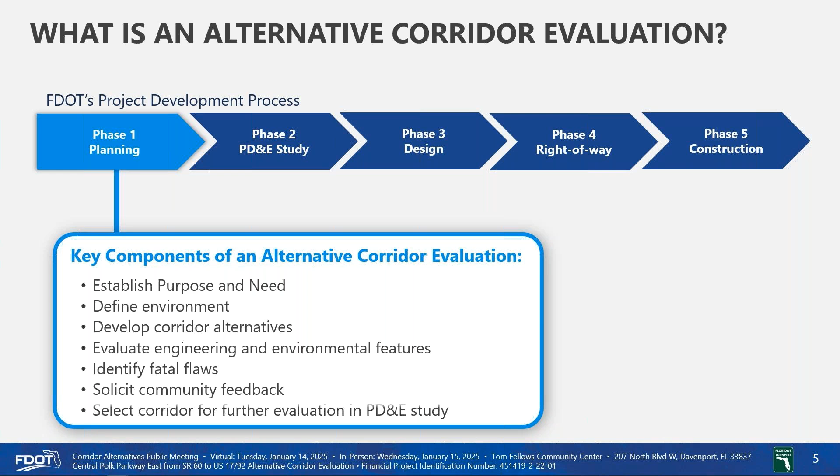The planning phase is the first phase of FDOT's project development process. An alternative corridor evaluation, or ACE, is a planning level study. Key components of an ACE include establishing the project's purpose and need, defining the environment, and developing corridor alternatives. The engineering and environmental features of each corridor is evaluated, fatal flaws identified, and community feedback solicited. If a feasible corridor is found, then it moves to the PD&E study phase for further evaluation.

The study area is located in northeast Polk County. The study area is a large swath that begins on State Road 60 west of the US 27 corridor and extends approximately 28 miles north to US 17/92 near Ernie Caldwell Boulevard.

The alternative corridor evaluation will consider options for a new tolled, limited access highway from State Road 60 to US 17/92. The highway would be constructed initially with 4 travel lanes, 2 in each direction, expandable to 6 travel lanes. Interchange locations will be evaluated in the next phase, which is the PD&E study.

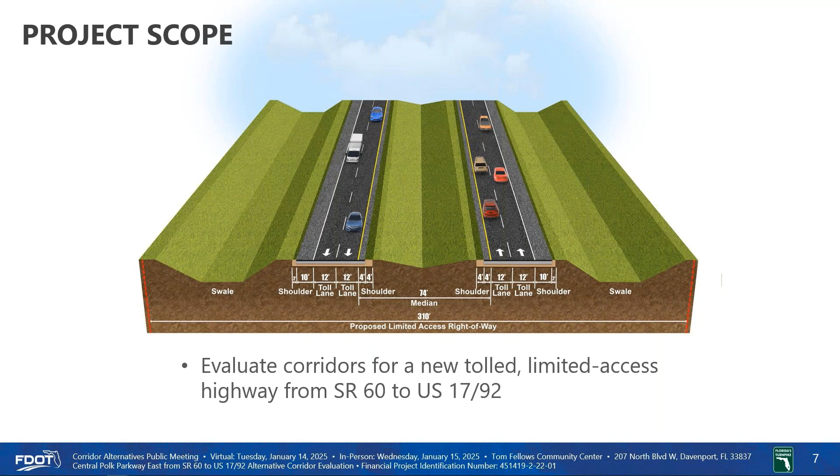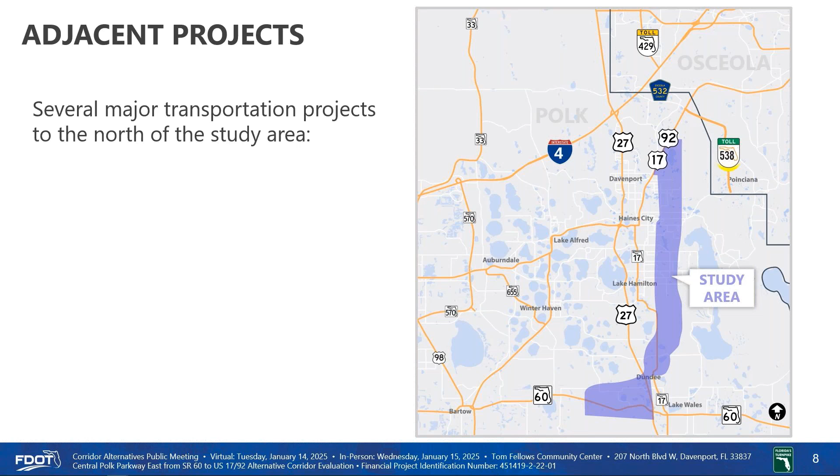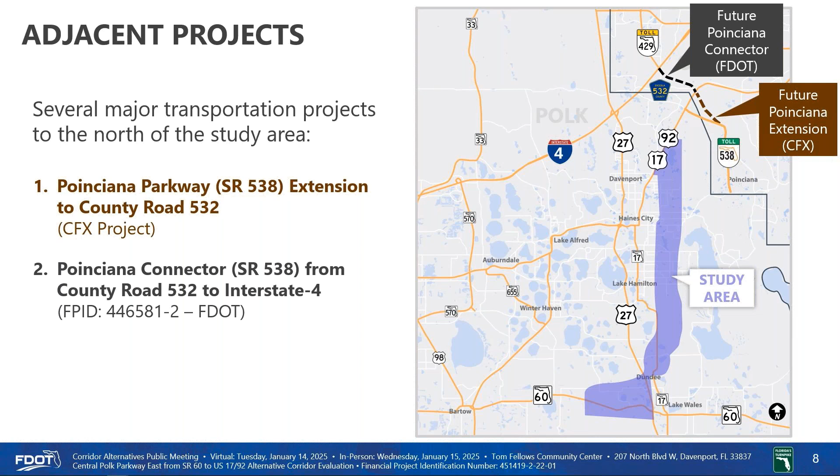There are several major transportation projects to the north of the study area. These include projects to extend Poinciana Parkway, State Road 538. The extension of Poinciana Parkway to County Road 532 is being completed by the Central Florida Expressway Authority, or CFX. The Poinciana Connector, a project to extend Poinciana Parkway from County Road 532 to Interstate 4, is underway by the FDOT. Also, the enterprise is conducting a PD&E study to evaluate a new, tolled, limited-access highway from US 17/92, south of the Power Line Road extension, to the future Poinciana Connector.

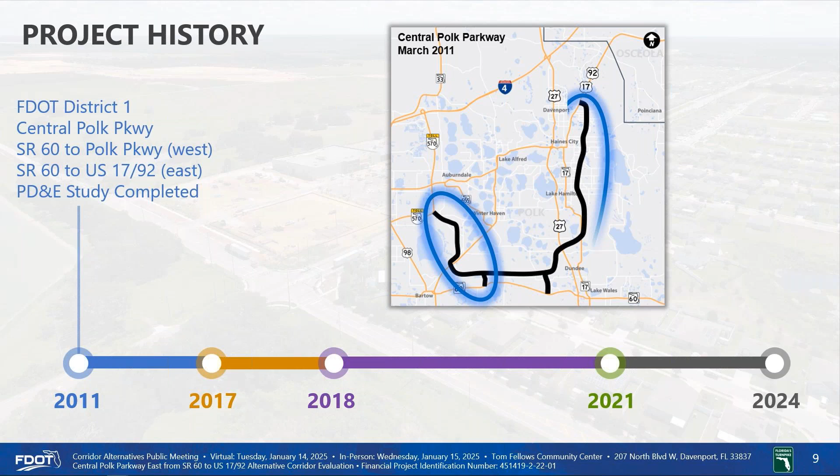An alignment for the Central Polk Parkway East project was approved in a PD&E study completed by FDOT District 1 in March of 2011. The District 1 PD&E study identified an alignment for a new highway from State Road 60 to Polk Parkway on the west and State Road 60 to US 17/92 on the east. The projects were transferred to the enterprise in 2017, and the enterprise immediately began piecing the puzzle together. Design of the Central Polk Parkway from State Road 570 to US 17 State Road 35 began in 2018, and the highway is currently under construction.

A PD&E study was conducted to extend Central Polk Parkway from US 17 State Road 35 to 60. Design is completed, and the project is anticipated to start construction in early 2025. The enterprise also conducted a feasibility study in 2018 to evaluate the addition of limited access general toll lanes on US 27. Results showed that it was not cost feasible.

In 2021, the enterprise reevaluated the route for the Central Polk Parkway East from State Road 60 to US 17/92 that was approved in 2011. However, construction of homes and businesses along the route required significant alignment changes, requiring a new evaluation. This Alternative Corridor Evaluation, or ACE.

A project's purpose and need are the reasons why the project is necessary and serve as the basis for identifying reasonable alternatives. The need for the Central Polk Parkway East project, established in 2011 by FDOT District 1, has been updated based on current and forecasted transportation deficiencies. The project needs include accommodating year 2050 transportation demand, improving regional connectivity, enhancing freight mobility and economic competitiveness, and enhancing safety and emergency evacuation.

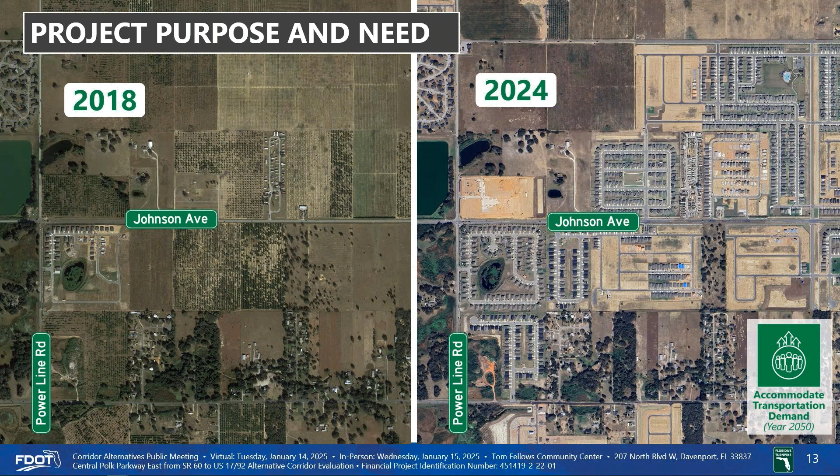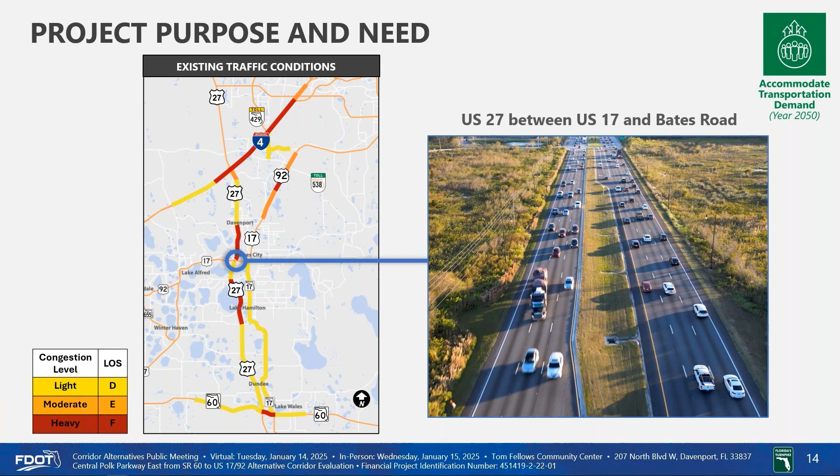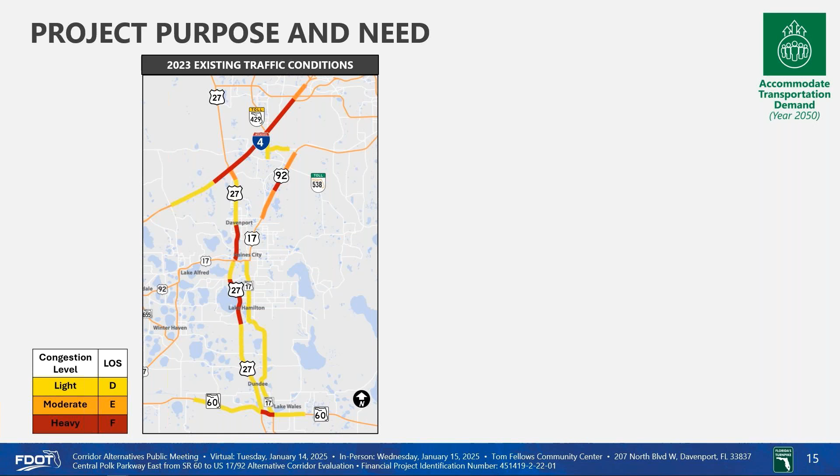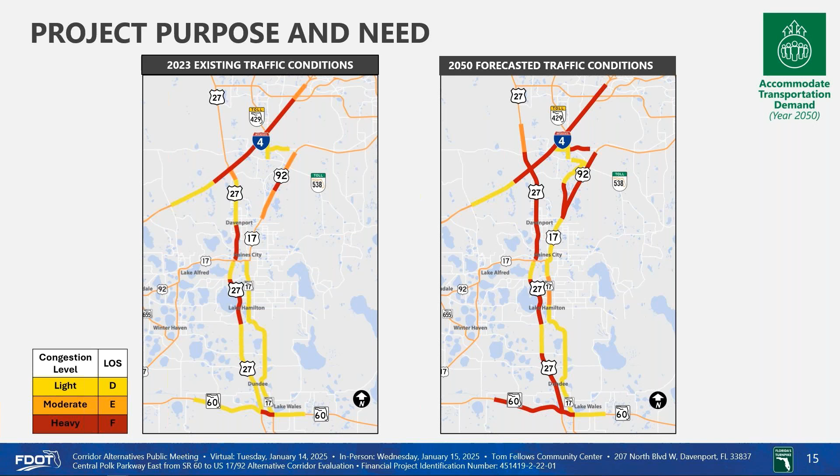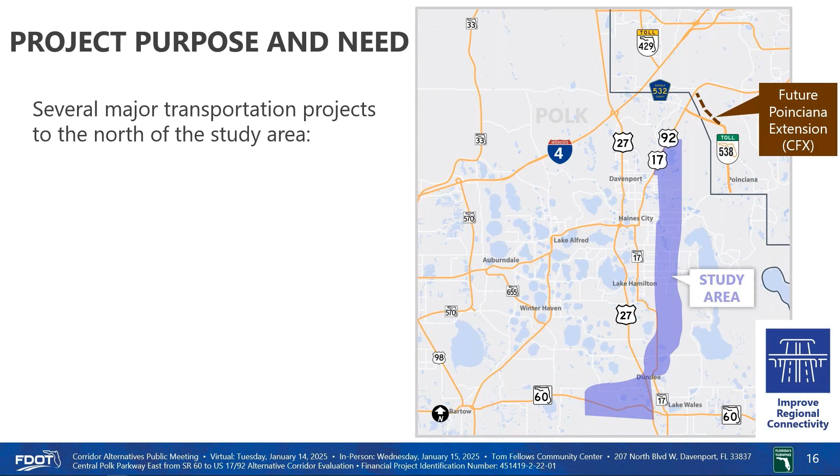Earlier in the presentation, 3 major transportation projects to the north of the study area were mentioned: the extension of Poinciana Parkway to County Road 532, the Poinciana Connector, a project to extend Poinciana Parkway to Interstate 4, and a PD&E study to evaluate a new tolled limited access highway from US 17-92 south of the Power Line Road extension to the future Poinciana Connector.

With the Poinciana Connector, this project would provide a direct link to State Road 429 and Interstate 4, relieving congestion on US 27 and other area roadways. Drivers will experience significant travel time reduction.

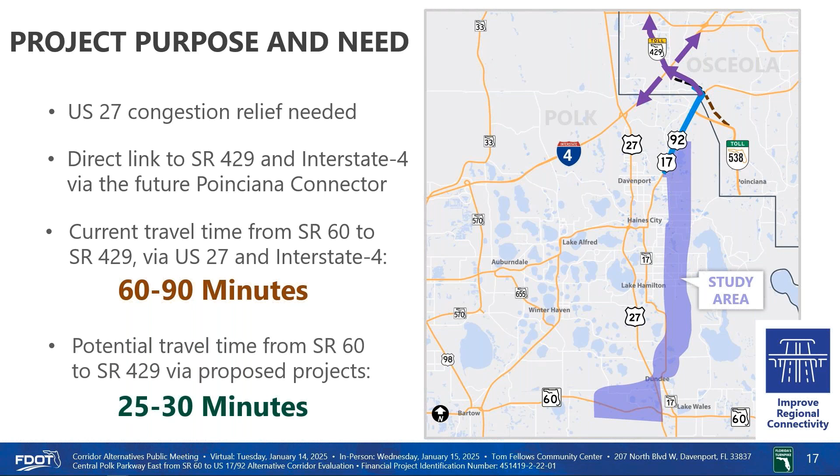For instance, current travel time from State Road 60 to State Road 429 via US 27 and Interstate 4 is approximately 60 to 90 minutes during peak periods. If the major projects were to be constructed, the potential travel time from State Road 60 to State Road 429 could be 25 to 30 minutes.

With more than 13 million Florida residents located within 100 miles of Polk County, the county's transportation system plays an important role in supporting regional and statewide goods movement. Based on 2023 data, Polk County supports more than 81 million square feet of freight-related land use, a total area more than twice that of the freight-related activity in nearby counties.

The Intermodal Logistics Center in Winter Haven is a major freight activity center with a capacity to process up to 300,000 containers per year. There is a need to improve the overall circulation of freight goods and support economic development within the area.

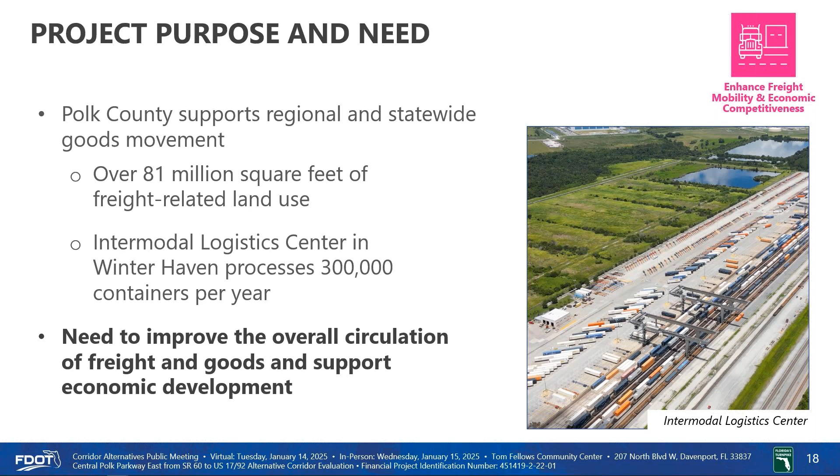The Central Polk Parkway East project will provide an additional option to the existing local and regional routes, thereby enhancing emergency response times and mobility during emergency events.

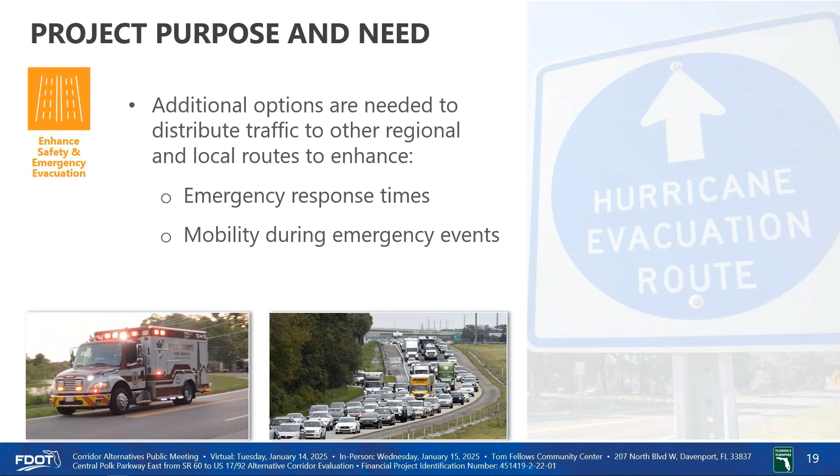Having established the project purpose and needs, the next step in the process was to define the existing conditions. There are numerous socio-cultural and environmental features present within the study area that influence the location of the corridor alternatives.

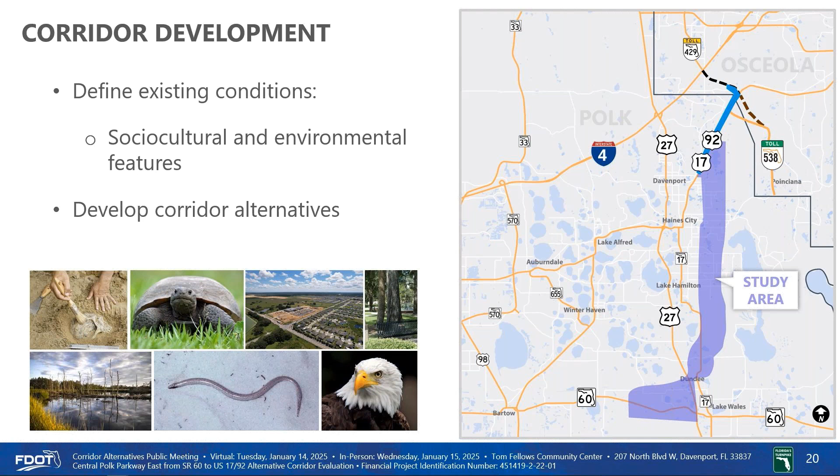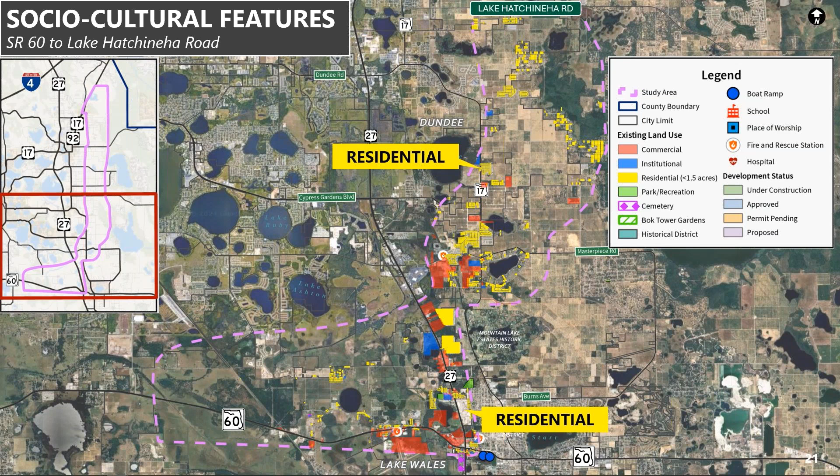Socio-cultural features include established residential neighborhoods with parcels less than 1.5 acres and areas of proposed development. The Lake Wales Historic Districts, Bok Towers, Eagle Ridge Mall, and the Intermodal Logistics Center fall outside of the study area. Impacts to these features will be avoided or minimized to the greatest extent possible.

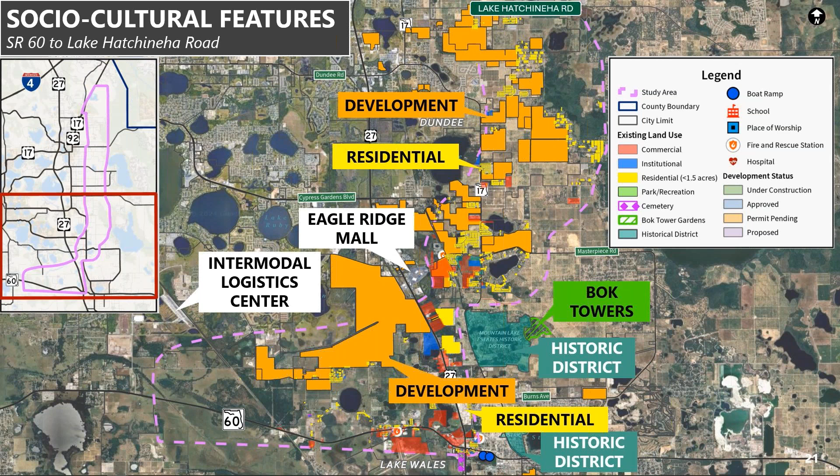Due to the size of the study area, the details of this overall map may be hard to see. To view these maps in greater detail, please refer to corridor maps on the project website or at the in-person meeting. Each map will have a legend that explains the symbols used for each feature shown.

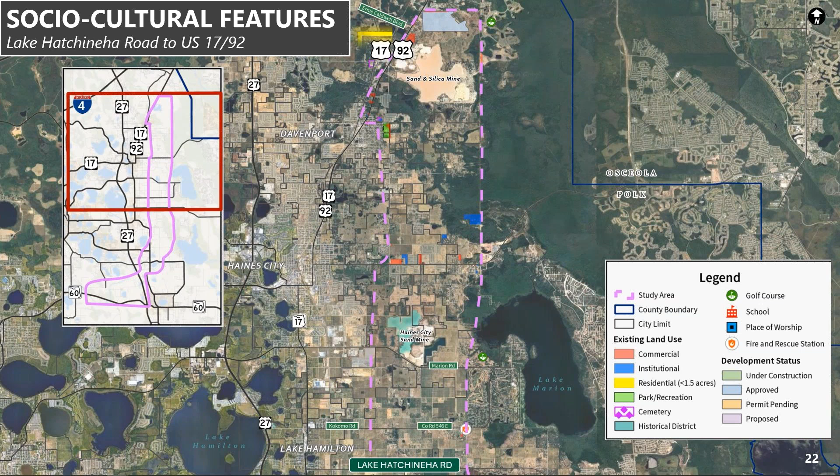Socio-cultural features within the northern half of the study area, from Lake Hatchineha Road to US 17-92, include public institutions such as churches, schools, and fire stations, established residential neighborhoods with parcels less than 1.5 acres, and new developments.

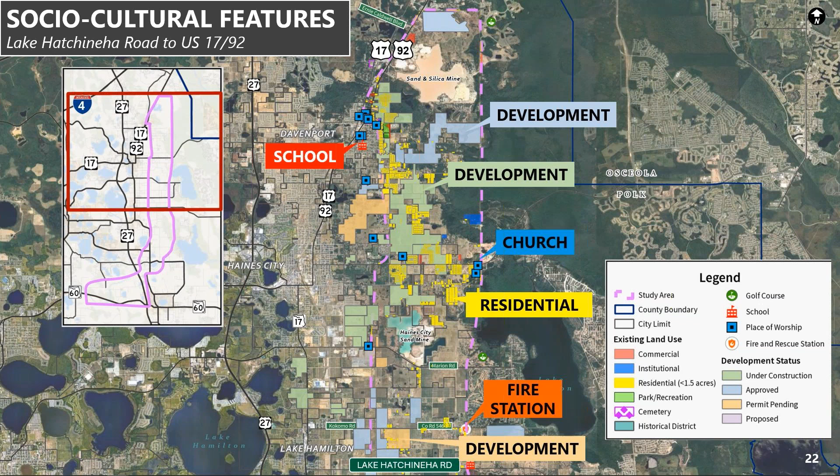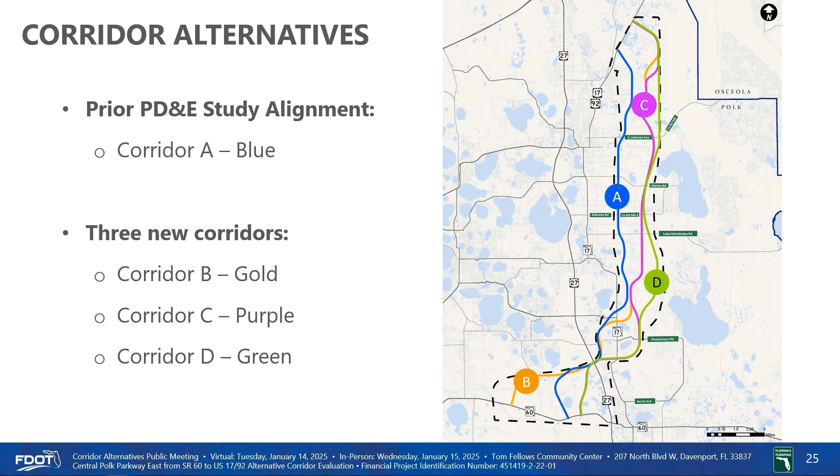On this map, we will present the corridor alternatives within the southern half of the study area, from State Road 60 to Lake Hatchineha Road. All the corridors will begin at State Road 60. Corridor A, from the prior study, is shown in blue. Corridor B, in gold, starts the furthest west on State Road 60. Corridor C, in purple, starts the furthest east on State Road 60. And Corridor D, in green, closely follows Corridor C until north of Masterpiece Road.

Due to the size of the study area, the details of this overall map may be hard to see. To view the corridor alternatives in greater detail, please refer to corridor maps on the project website and at the in-person meeting.

On this map, we will present the continuation of the corridor alternatives within the northern half of the study area, from Lake Hatchineha Road to US 17/92. All the corridors will end at US 17/92. Corridor A from the prior study is shown in blue. Corridor B in gold is located toward the east within the study area. Corridor C in purple closely follows Corridor B. Corridor D in green would be located the furthest to the east within the study area. To view these maps in greater detail, please refer to corridor maps on the project website or at the in-person meeting.

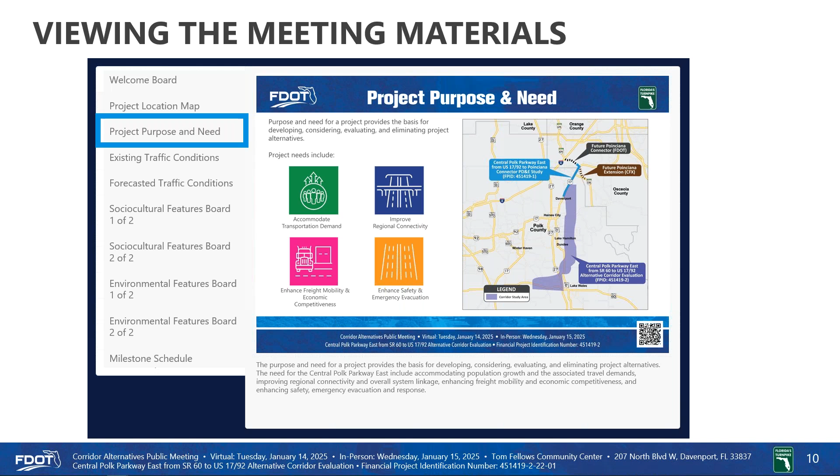As mentioned at the start of this virtual public meeting, we will be responding to questions that were submitted through the meeting registration. I'd like to acknowledge that we did receive quite a few questions directly to me at my email address and through the project website. All questions will be responded to at a later date, but this evening we will focus on the questions submitted through the GoToWebinar meeting registration.

Tonight we'll be answering 65 questions, the first being—and this is where Imran Ghani from the project team will jump in to start assisting me with answering these questions. The first being: what is the specific route contemplated?

As shown in the presentation, there are 4 corridor alternatives under evaluation: corridor A, B, C, and D. They are being presented for community feedback. Detailed corridor maps are available on the project website and will be shown at the in-person meeting tomorrow.

We anticipate presenting the selected corridor for public input at a public meeting in the second quarter of 2025. The final alignment within the selected corridor will be determined during the PD&E study phase. Right now what we're doing is presenting 4 corridor alternatives, which will eventually be narrowed down to 1 for further evaluation in the next phase.

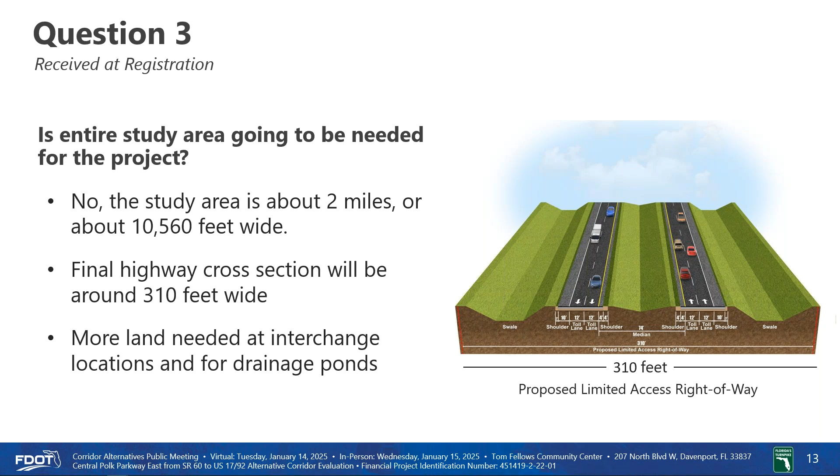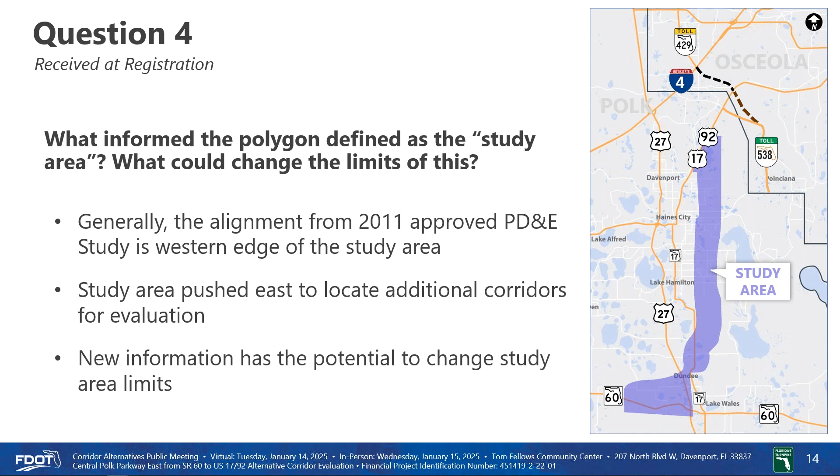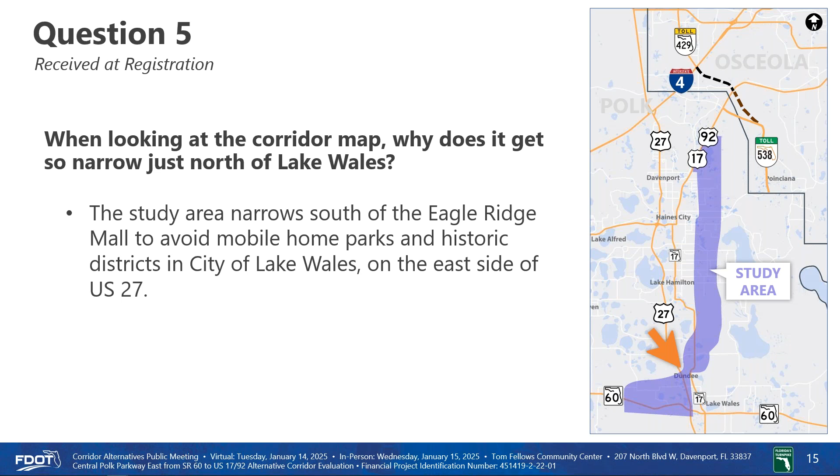Thank you. Question 6, and we covered this in the project presentation, but we'll do it again: where exactly will the connection start from State Road 60, and where does it travel through after that? Generally, the study area starts at State Road 60, and our corridors are between Logistic Parkway and US 27.

From here, the study area moves north and east, just south of the Eagle Ridge Mall. Further north, the study area ends near US 17/92, near the intersection of Ernie Caldwell Boulevard. The 4 corridor alternatives are all located within the study area. Detailed maps of the corridors are available on the project website and will also be shown at our in-person meeting tomorrow.

So the next set of slides, we have quite a few, about 20 slides, where individuals asked what the impacts would be to a specific address or a specific road. So we're going to go ahead and cover that. We know that although we're covering only those who submitted through the meeting registration, a lot of people will be interested in this type of question.

Please see the corridor maps. At tomorrow's meeting in person, we'll be able to walk you through and find a specific location you may be interested in. Or you can call me, email me, and we will provide the answers. These folks submitted this particular type of question, and we will now be answering them.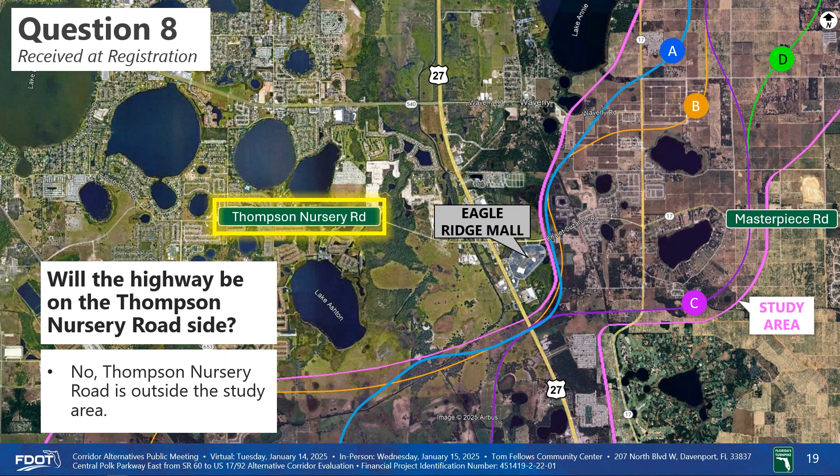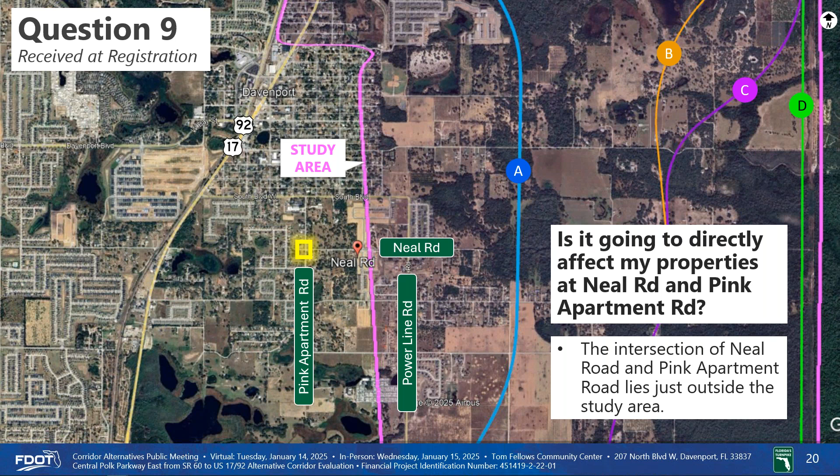Will the previous Parkway plans, referring to the 2011 alignment, for the area east of Haines City be reevaluated? Yes, that is correct. The previous Parkway plans became corridor alternative A in this study. In addition, we have 3 new corridor alternatives under evaluation.

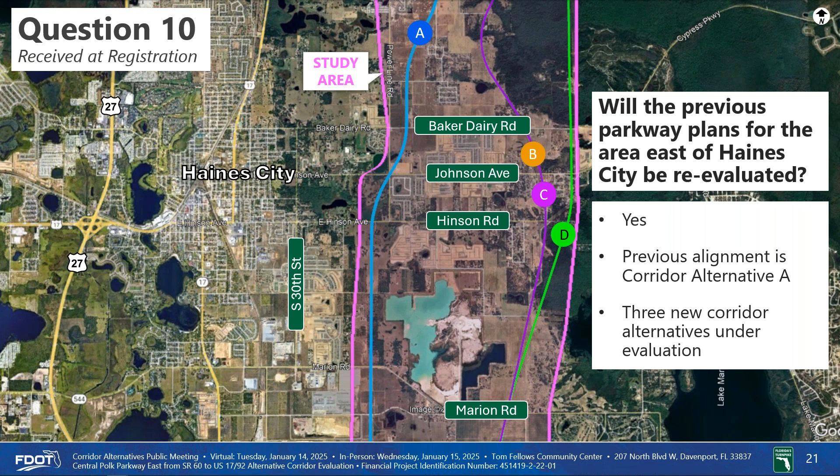We're encouraging everyone to view the corridor maps or attend in person, where there'll be plenty of folks from the project team to assist with answering questions and locating addresses.

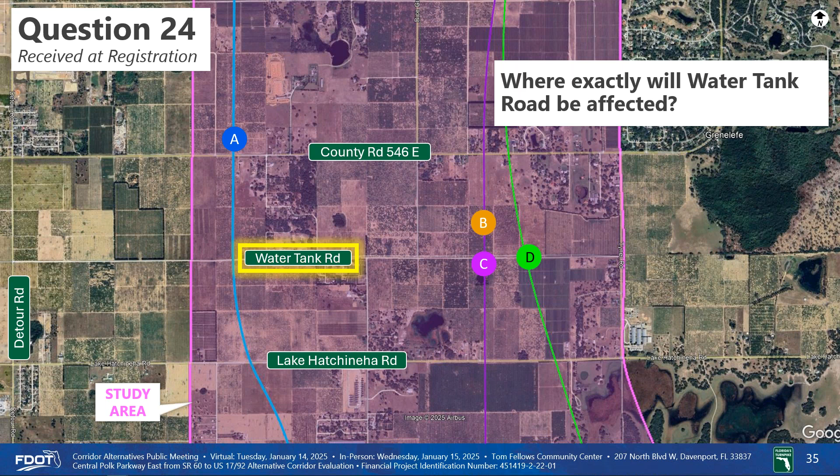We're nearing the end of such questions. This one is regarding Water Tank Road. How will that be affected? All four corridors will cross Water Tank Road. None of the corridors actually use Water Tank Road, they simply cross over it. As a reminder, one corridor will be selected for further evaluation in the PD&E study.

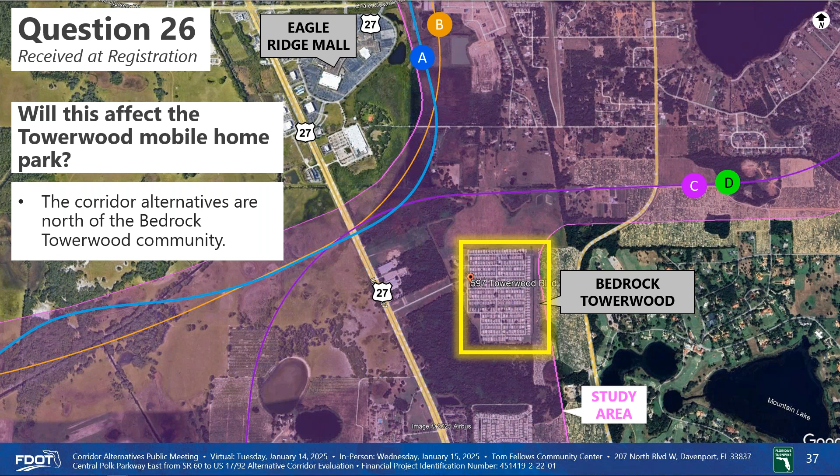343 West Central Avenue in Lake Wales. All corridors are west of US 27. That address is east of US 27.

6636 Spinner Drive. All corridors are west of that address.

Power Line Road. The question is, how close is Power Line Road to the proposed highway? Power Line Road is west of all four corridors. It comes closest to corridor alternative A.

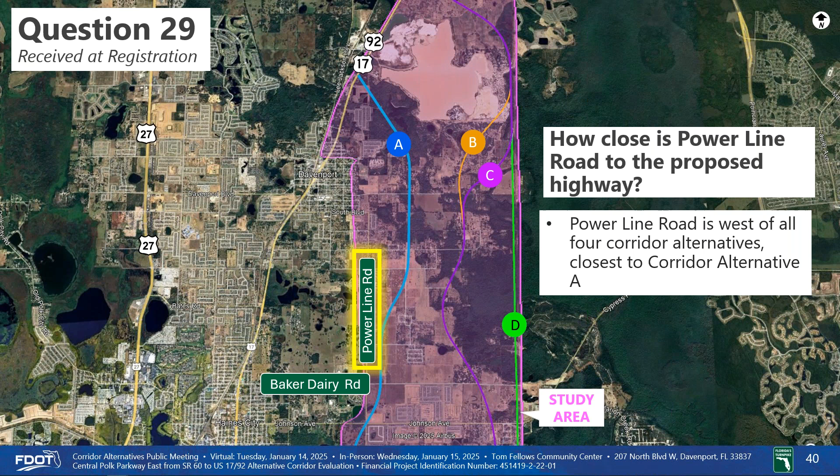How will the project affect State Road 17, a scenic highway referred to as the Ridge Scenic Highway? None of the corridor alternatives utilize State Road 17 or the scenic highway, they simply cross over it. All four alternatives will cross it, and we will be narrowing down to one alternative for the proposed highway.

That's the end of that type of question, where we're looking at potential impacts to a specific road, community, or actual address. I know many people online may have questions like this. Please reach out, attend in person, or email. We are here to answer your questions and address your concerns.

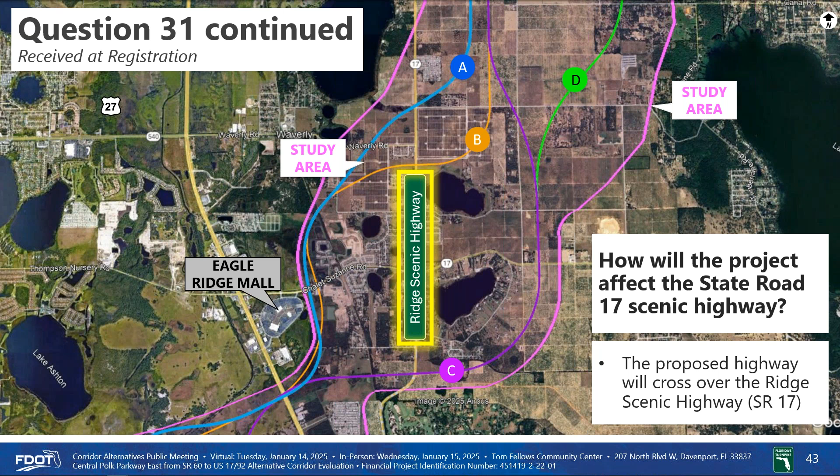Moving on, what is the proposed distance of the new road from residential properties along this path, and what visual impact can be expected? The distance from residential properties to the proposed highway differs based on the corridor alternatives. The proposed highway will mostly be at grade. However, we do anticipate elevating some segments to go over local roads so that we can maintain local connectivity.

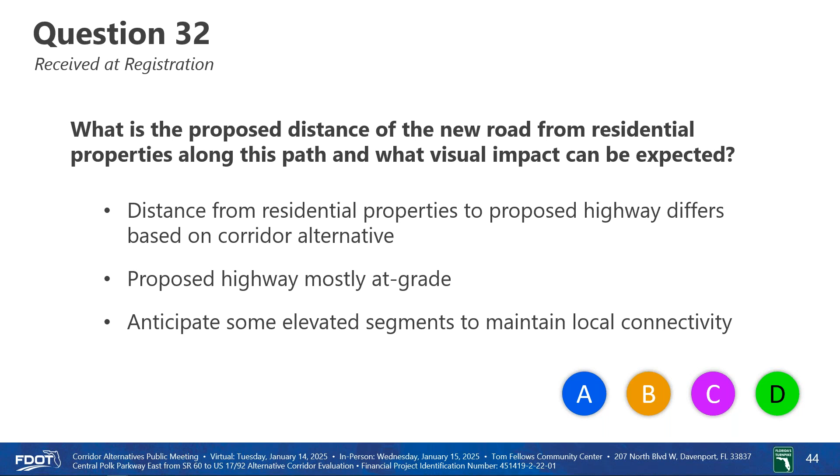Now with the new road, we will need land for this new road, so the next set of questions are related to right-of-way. Is the property needed for this project already owned by the city, county, or the state? No, the property needed for this 28-mile highway project is not already owned by the city, county, or state. FDOT will attempt to maximize the use of currently publicly owned parcels along the path of the proposed highway. The path of the proposed highway is not yet known. We're going to narrow it down and continue, and then eventually it will be known.

Will the route go through areas with homes or just farmland? The four corridor alternatives impact parcels with varying land uses, including residential, commercial, and agricultural. Please see the evaluation matrix for the number of parcels impacted by each corridor alternative.

Will Polk County be purchasing the property? No, FDOT will be purchasing any needed property for this project.

Here is a frequently asked question. We were asked this in different ways, two of which are shown on this slide. If the proposed project uses homeowners' properties, how will they be compensated? And what will happen to the homes and businesses in the path of the planned highway? FDOT will make offers based on fair market value as determined by a third-party independent appraiser during the right-of-way acquisition phase. In addition, property owners have numerous rights under Florida law that will be explained during the offer. FDOT will have dedicated relocation agents for potential and actual relocations.

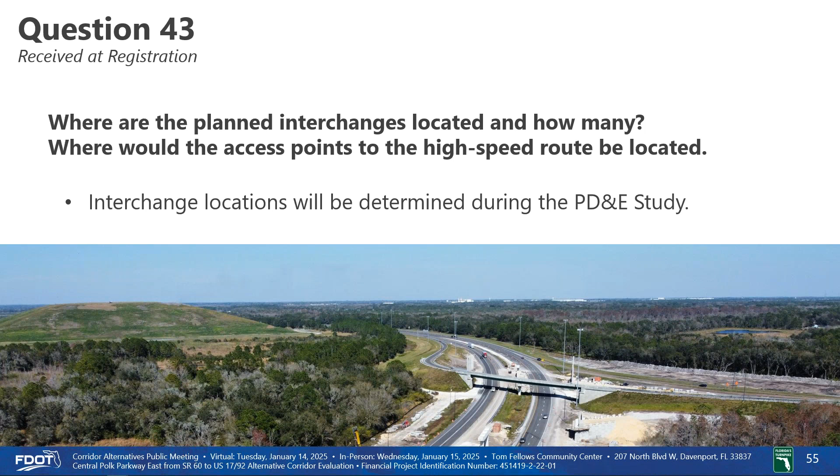Okay, so we'll look at them at a very high level in the ACE, the alternative corridor evaluation, but we won't really be digging into the details until the PD&E study. Correct. How much is this project going to cost taxpayers? The project will be funded through toll and concession revenues collected on Florida's turnpike facilities. The total cost of the proposed highway project is currently not known.

Will all of the extensions be toll roads? So the question is basically asking, is the proposed highway going to be all tolls? Yes, the proposed highway will be a tolled road.

We've explained this before, but there's no harm in explaining again how folks can see the corridor alternatives, because that is why they are joining us today and tomorrow night. So Imran, how can they view the corridor alternatives that we've presented? Detailed project maps are available at the project website. That website address is www.centralpolkparkwayeast.com. Once you go to that website, please select project 451419-2. Then click Public Meeting Exhibit Room or simply scroll down to Documents to view the location and corridor maps.

We covered this in the presentation, why the project is needed. We call them project needs, the project purpose and need. Can you answer this again? Why is the road necessary? So the need for the proposed highway is based on current and forecasted transportation deficiencies. The purpose of the project is to accommodate transportation demand, improve regional connectivity, enhance freight mobility and economic competitiveness, and enhance safety and emergency evacuation.

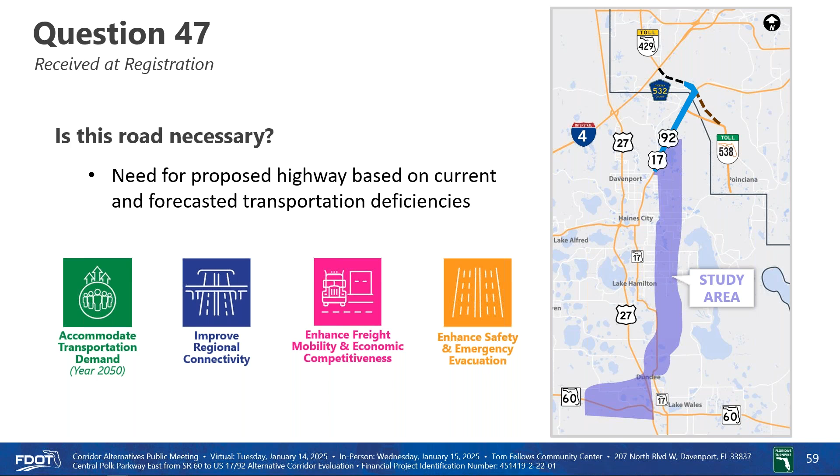Question 48, is the US 17/92 expansion planned to be completed before this project? And if so, would that be sufficient to help alleviate congestion? So the enterprise is conducting a PD&E study for a new highway from US 17/92 to the future Poinciana connector. This project is very likely to be constructed first and would partially alleviate traffic on US 17/92. However, it would not provide substantial relief to US 27.

And when you said this project, Imran, would be constructed first, you mean the highway from US 17/92 to the future Poinciana connector, correct? Correct. Thank you.

How will this project, the planned highway from State Road 60 to US 17/92, affect property value? Florida's Turnpike Enterprise only appraises those properties that are needed for the project. The enterprise does not provide opinions on potential future property values.

Thank you. So we have 15 more questions to go.

Question: is there an existing example of what the highway would resemble for a reference point? There is a toll facility in Polk County called Polk Parkway that will be very similar. Polk Parkway, after being widened, is a 4-lane toll highway with 2 lanes in each direction.

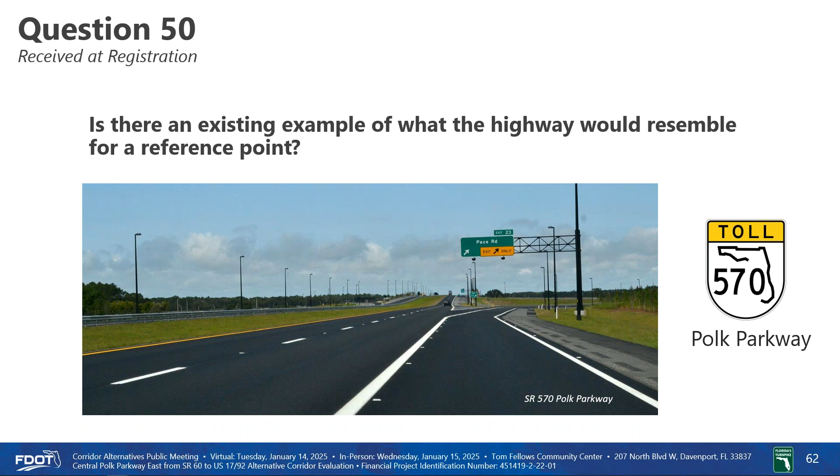Let's switch gears to environmental. What are the environmental considerations for the path of the project? The enterprise will evaluate potential impact to the natural, social, cultural, and physical environment. We strive first to avoid any environmental impacts. If we cannot avoid them, our next challenge is to minimize those impacts. Potential mitigation strategies for unavoidable environmental impacts will initially be considered in the ACE study and further evaluated during the PD&E study phase.

Will wildlife corridors or underpasses be planned and built? And who is being consulted as to wildlife corridor needs? Wildlife corridors within the project will be identified in the ACE. Potential wildlife crossings will be evaluated during the PD&E study. We will coordinate this effort with U.S. Fish and Wildlife Service and Florida Fish and Wildlife Conservation Commission.

Question: is there any other option other than running it through where it's projected to run through? Unfortunately, there are very limited opportunities outside of the identified study area for a new highway that parallels US 27. There is a lot of growth in Polk County, Imran.

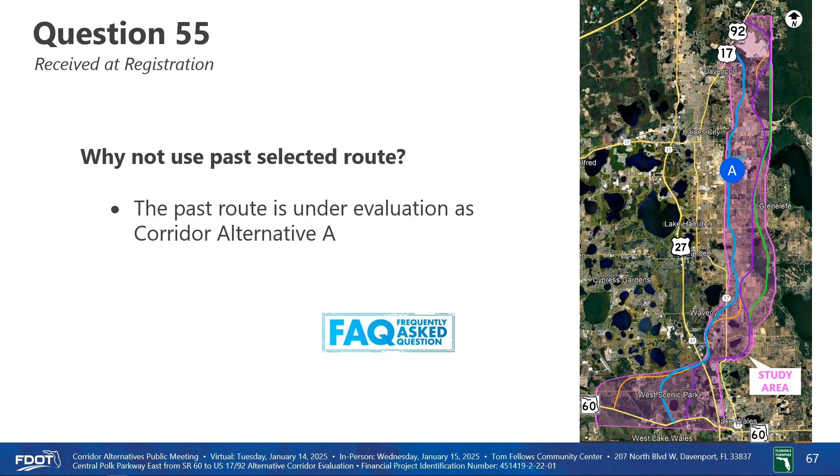We discussed the 2011 alignment that was approved under the District 1 PD&E study, and we've received several questions as to why not use the past selected route. We are using the past selected route—that past selected route is corridor alternative A. In addition, we have developed 3 new corridor alternatives. So when you say we're using it, it is one of the corridor alternatives under evaluation. Correct.

Why is east of Lake Wales not being considered to connect to State Road 60? We had a handful of this question, where folks are wondering why we did not intersect with State Road 60 at the Super Walmart. We actually did evaluate a connection east of US 27 in Lake Wales, and it was eliminated based on coordination with the city of Lake Wales. That alternative had too much impact to existing land uses.

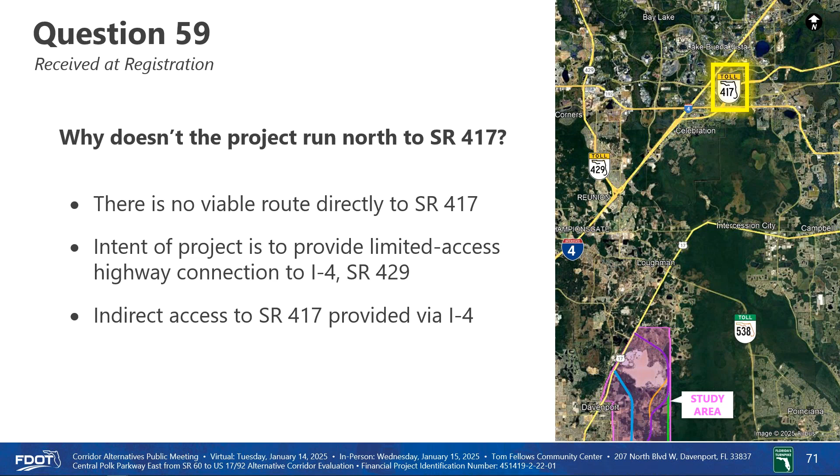All right, so 60, 5 more to go.

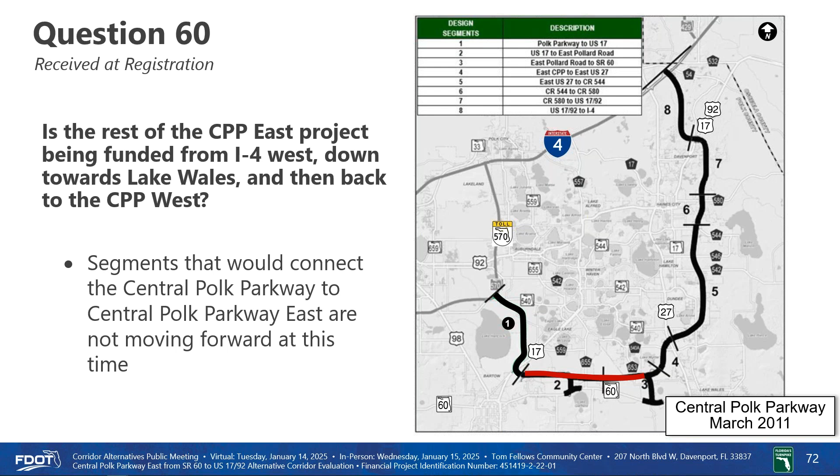Is the rest of the CPP East project being funded? The graphic on the right shows the approved design segments from the 2011 PD&E study. It started at I-4, and then it was like a beltway to get to 570. This person is asking what is happening to the segments shown in red that would connect Central Polk Parkway on the east to Central Polk Parkway that's under construction on the west. Those segments shown in red, connecting the two, are not moving forward at this time.

Is the project fully funded? This is a frequently asked question, Imran. So the project has partial design and right-of-way funding. The construction is currently not funded. As I mentioned earlier, FDOT evaluates funding on an annual basis, and this project is a high regional priority.

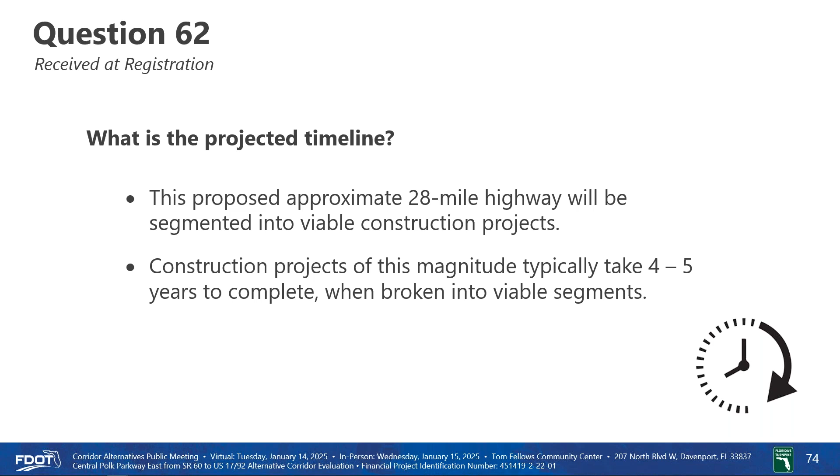The next question is, what is the projected timeline? So the proposed 28-mile highway will be segmented into viable construction projects. Construction projects of this magnitude usually take 4 to 5 years to complete when segmented. So we can't give an actual timeline because construction is currently unfunded, but we can say it would be 4 to 5 years when broken into segments.

Last three, Imran. Sure, thank you for your help with this. Is it not wiser to affect the future lifestyle of newer residents moving into the area than those who currently live here and enjoy an established lifestyle?

We are attempting to first avoid and then minimize impact to all neighborhoods. As part of the project, we have been coordinating with developers and local governments of planned communities to see if they can accommodate a potential highway.

We're going to continue to coordinate with the local governments to build a transportation project that achieves a shared community vision. And of course, meetings like tonight - we'll have one more meeting in the alternative corridor evaluation phase, and at least 2 during the PD&E study, including a public hearing. The community input that we receive through this process will help inform our decision-making.